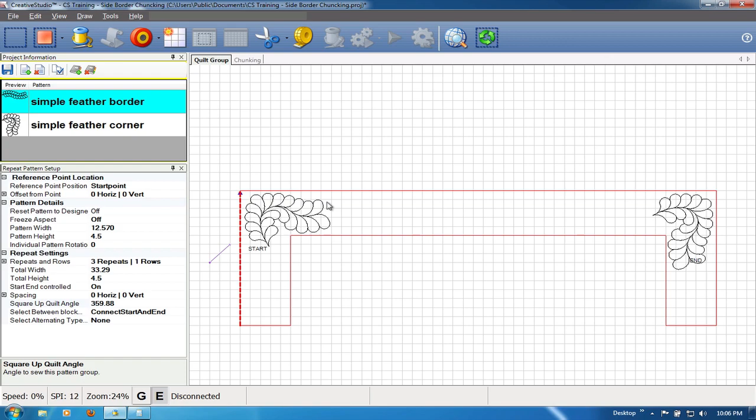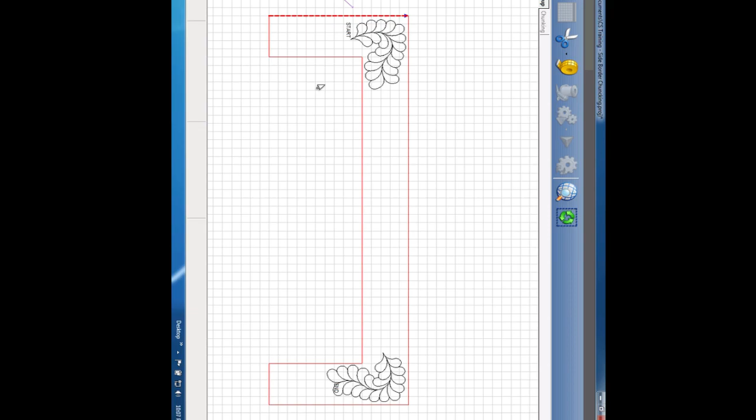Also, on the CAD here, I've got the top border laid out with my corner patterns in place. If you imagine this turned on its side, this space right here is what you are going to be left with to fill on your side borders as you chunk down them. This measurement is pretty critical to figure out how many repeats you need and what size they need to be. To get that measurement, I measure from the top edge of my quilt to the end of this pattern—that's your critical dimension, where that pattern actually stops quilting.

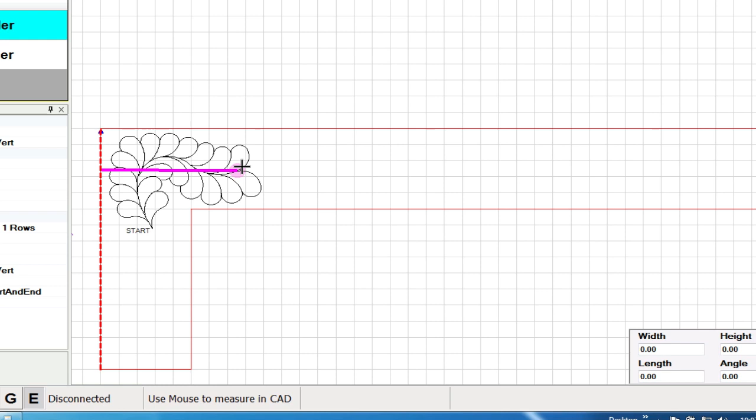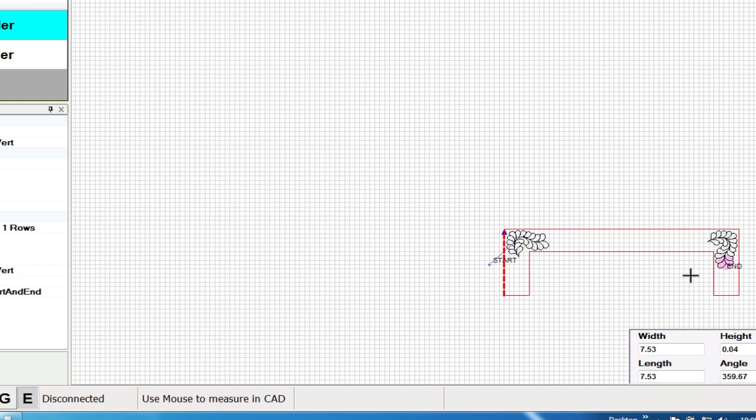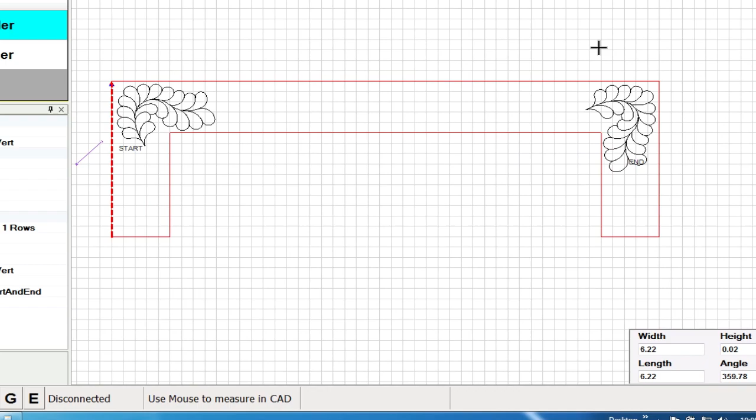In this case, I'm going to use Alt-M to do my measurement. Oftentimes in the real quilting world, I'll just use a tape measure. So I'm going to measure from right here, put my end snap on, and measure to the actual end of that pattern. Down here I can see it is 7.53 inches. I'm going to write that down now so I remember it. Then, over here, I'm going to take another measurement—from this end, turn my end snap back off, over to the edge of the quilt again. That measurement is 6.22 inches. So that's the space between the start and end of the patterns.

My quilt length is 56 inches overall. Bringing up my calculator: my quilt length is 56 inches, then I subtract the distance over here, which was 7.53, and I also subtract the distance over here, which was 6.22. That gives me a total space to fill of 42.25 inches on my side borders. I want to remember that number because I'll need it to set up my side borders for chunking.

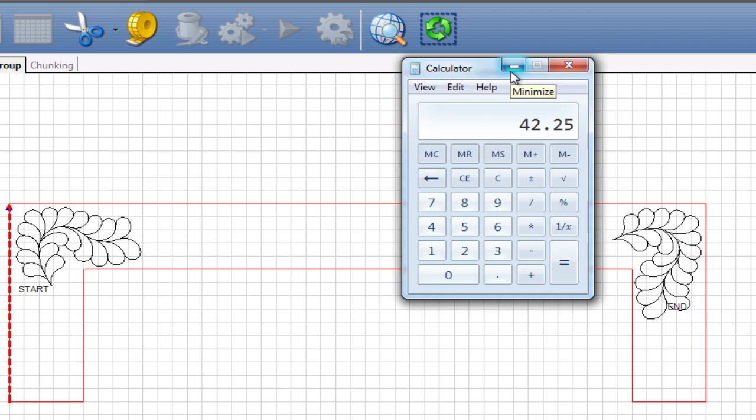Also, I like to remember that quilts shrink as you go down them usually. So generally, if that measurement was 42.25, I usually subtract about an inch, sometimes 2 inches if it's a very long quilt. In this case, I'm just going to subtract an inch and make it 41.25 inches.

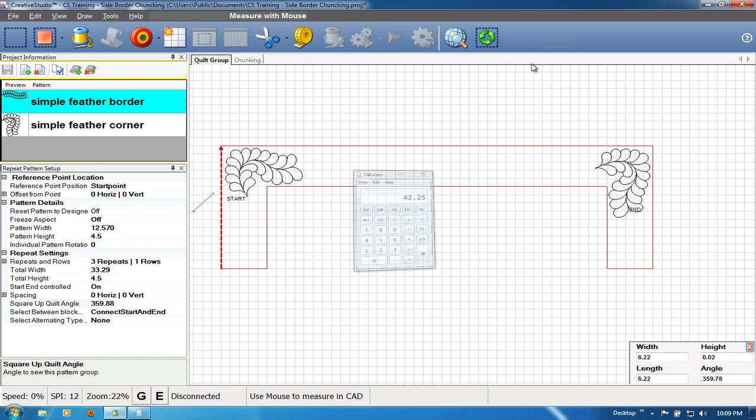It's not a very hard thing to do from this point forward. You'll notice I have a new quilt group here, which I called chunking—sometimes I call it side borders. You can call it whatever you want, just so long as you can refer back to it as you scroll or roll down the side of your quilt. I'm in standalone mode here for this demonstration, so my two side borders are awfully close together, but it will serve the purpose. I have a border on the left side and a border on the right side. We already did our measurements, and we know that between the two corner patterns there will be 42 or 42¼ inches to fill. We're subtracting 1 inch to allow for shrinkage, giving us a total of 41¼ inches to fill down the sides.

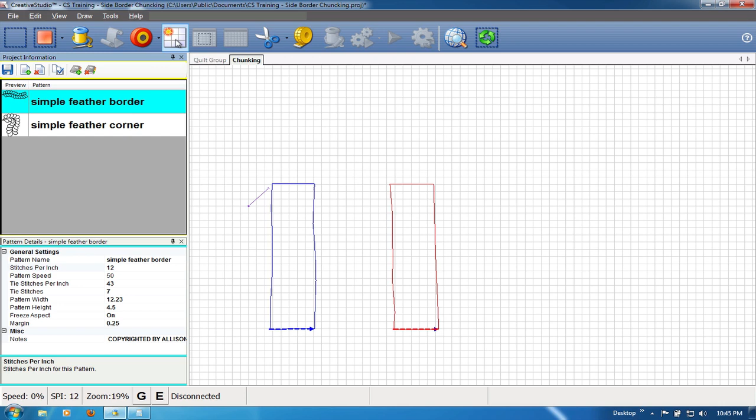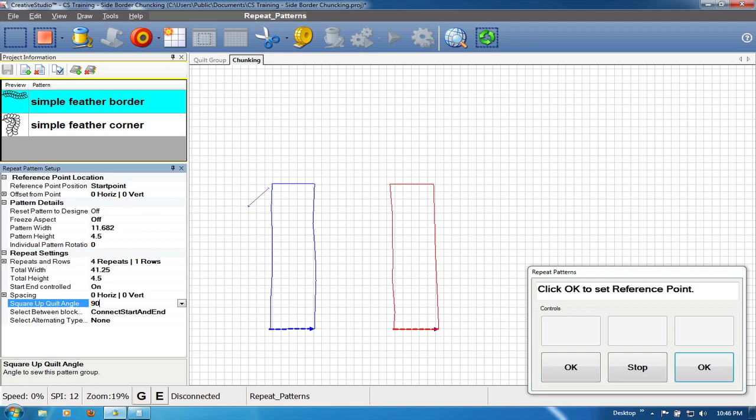To do that, I go into repeat pattern mode, and go to my total width. The actual height of my border, the simple feather border pattern, was already set to match the quilt size. In this case I want the total width, because we're going to set this part of the pattern that goes this way, but use the square up angle to determine which way the pattern runs. So at total width, I'm going to put that dimension, 41.25. You want to make sure the start-end control is on, and then on the square up angle, I'm going to put in one simple figure: 90 degrees. 90 degrees takes care of the left side of the quilt. When I hit OK, there it goes.

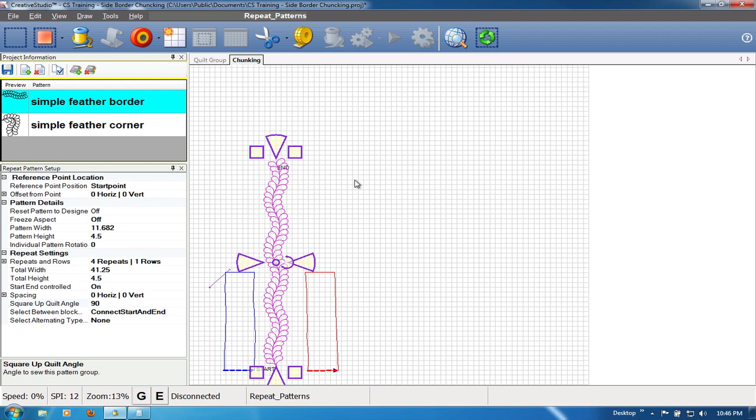This particular pattern runs in a clockwise direction. I'm going to move it over here just to get it out of the way for when I place the other one. Anyhow, those would be the repeats we need to run between the border corners. Of course, you can see how much room I have to quilt with—we won't be able to fit the whole thing in one pass. But then I want to set up for the other border as well.

Again, my total width is 42.62. Start end control is on. Whoops, I don't want a bobbin pull up there. We want to connect the start and ends.

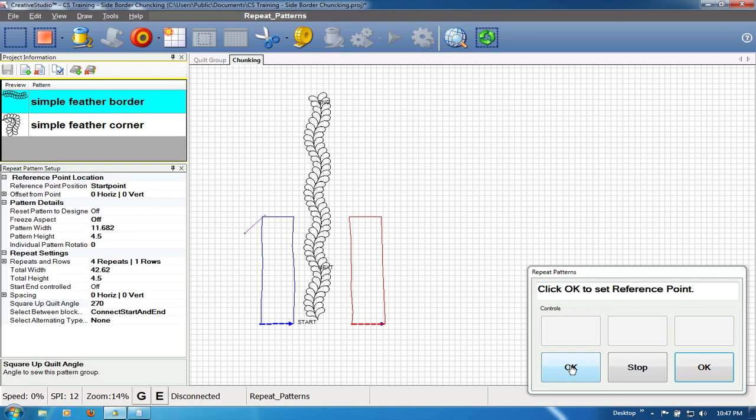The square up angle for the right side of the quilt, when a border pattern is running in a clockwise direction, is 270. Put that in, I hit OK, and there's the borders running this way. So it is 90 degrees for the left side of the quilt, 270 degrees for the right side of the quilt. I keep that on a little piece of paper taped to my monitor so I can plug those figures in very quickly and easily.

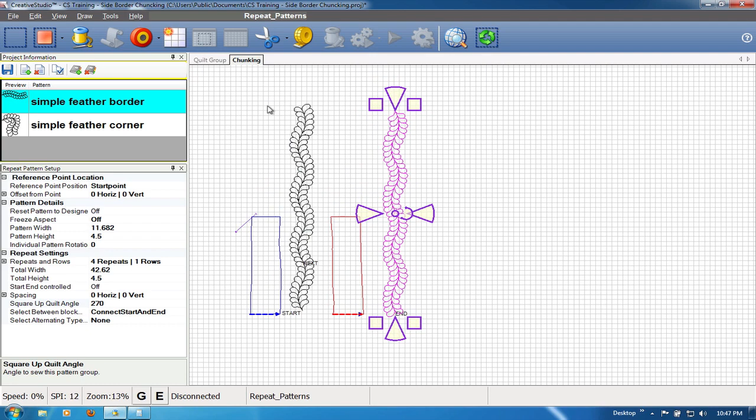Anyhow, these patterns are all right here and they are ready to be used, but I am going to toggle them sewn so that certain ones don't get stitched out that shouldn't. That will cause a problem.

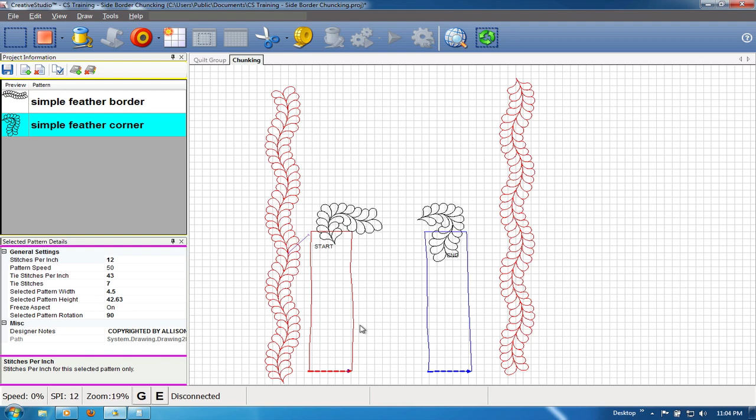Okay, now if you've noticed, I placed a couple of corner patterns on my CAD here. They are imaginary patterns for me on the screen, and for you. In actuality, the corners are on your quilt. You can't see them on the screen.

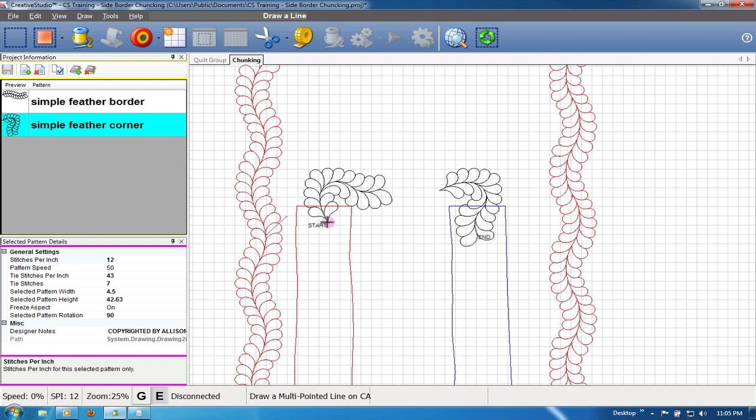So what I like to do to be sure I know exactly where I need to line my border up with the corner pattern is use a point-to-point line. On the screen, because I am in standalone, I'm going to say Alt-L, and use an end snap. Now you will be on your Statler, so you are going to use point-to-point line. You're going to take the head of your machine and find exactly where that corner pattern started last time. Look for the tie-off.

Go out to the side here, make a little check mark. I like to do the check mark again because it gives you something that you can really grab hold of. Then I'm going to go over here and do the same thing. I'm going to find exactly where that pattern stops stitching. I'm going to go out and make a little check mark.

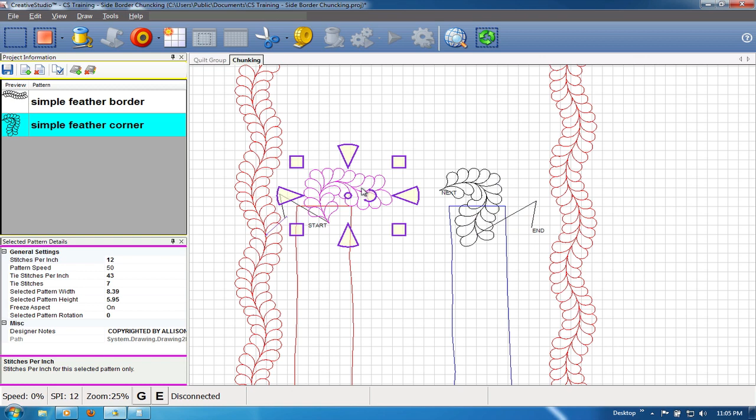I can delete these two patterns because we really don't need them there anymore. Because actually that's all you're going to see on your screen. Those corners were on the quilt, not on the screen.

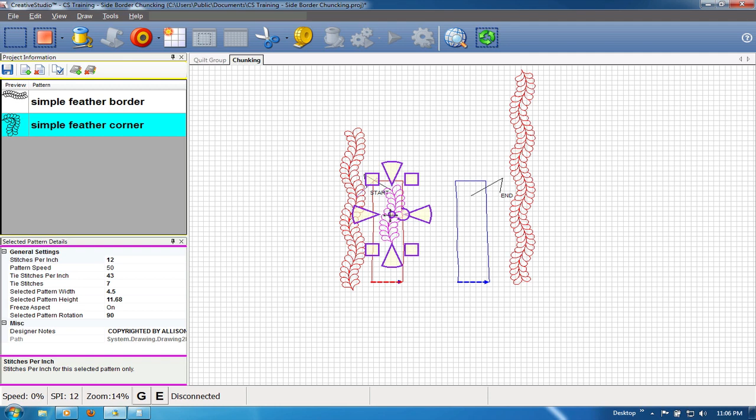Now I'm going to drag this pattern because I'm only going to be able to fit one repeat. I can't fit two. I'm going to drag this pattern and this pattern right down here to fit. It needs to go somewhere right around in here.

I'm going to change to my F11, my end snaps here. Put end snap on and snap it to that point right there. And then I'm going to use this side. I'm turning end snap off.

I'm going to tip it so it fits right. These borders are really out of whack.

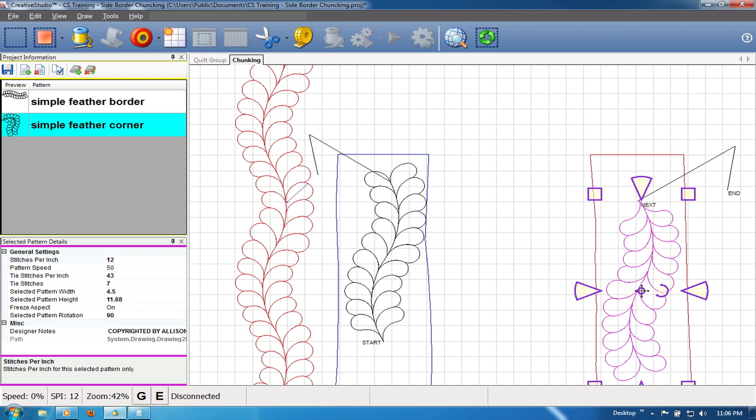I'm going to use, whoops, I hit F8. I'm going to use F9 to get myself close to the starting point of that pattern. Switch to F11, my end snap handles.

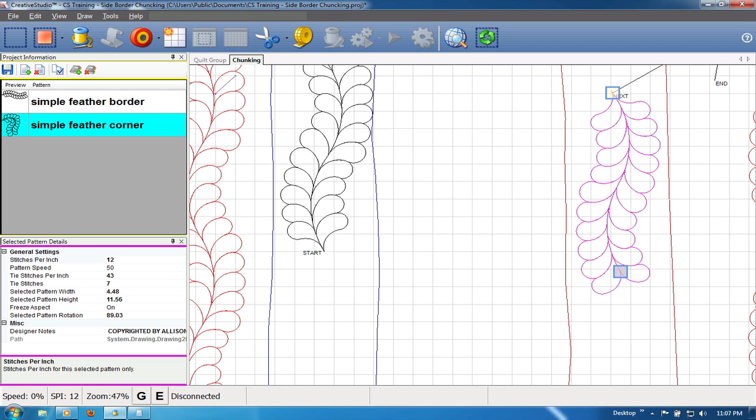And I'm going to snap this end right there to the pattern. Then I'm going to go over here and take end snap off, and rotate this so it fits real nice in that border. Be very careful that you don't stretch it out, because if you stretch it out, you're going to change your measurements as far as the overall pattern goes.

Alright, let's toggle this sewn and toggle this sewn. And then these patterns are ready to stitch out.

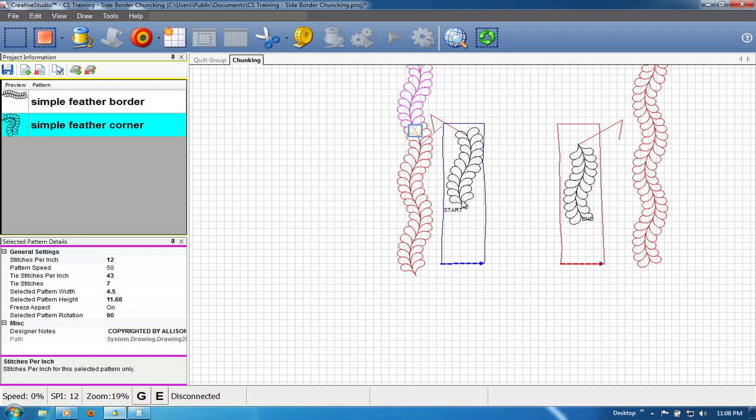The next time you roll your quilts, you'll do the same thing with the check mark again. You'll make a check mark where this one stopped and started, a check mark where this one stopped and started, and then you can just take your next repeat. I like to use a fresh repeat every time, because if you did alter anything on this pattern, at least you know you've got your original dimensions back again.

Something else I like to consider too, if you notice, this had originally made 4 repeats. It was 1 here, 2, 3, and 4 repeats. After I get done with about half the quilt, sometimes three-quarters of the quilt, depending on how long it is. In this case, I would definitely do half the quilt.

I like to go with a tape measure then, and measure from the last end point of the border I did, and measure down. I unroll some of my quilt and measure down to where that corner is, just to see if my measurements are still coming up pretty close.

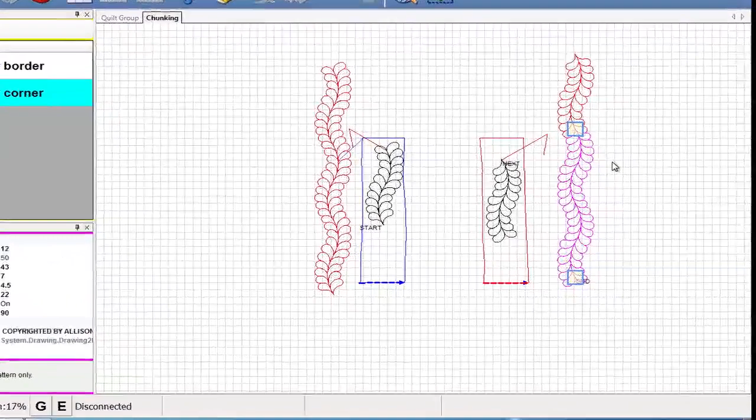You should be able to use Alt-M and measure from this end snap to that end snap and see if your dimension is actually pretty close to what you have left on the quilt. If it's not, I would highly recommend...

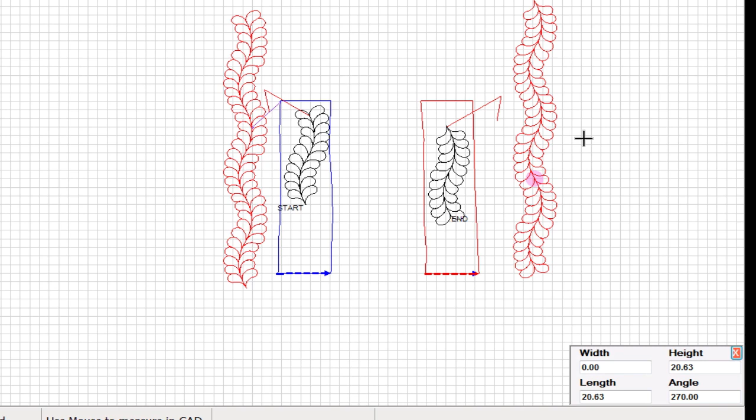Selecting those 2 patterns, switch over to F9 and make it shorter or longer. Make your adjustment now. Don't wait for that last repeat. It will be a pill.

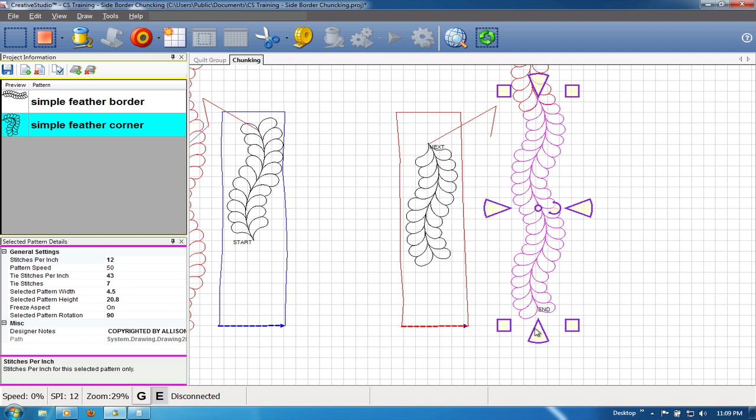Sometimes I've had some pretty wild surprises left at the very end, and it's too late to correct it with 1 repeat. If you have 2, you can kind of get something done, but if you have only 1 repeat left, there's not a lot you can do, because you're either going to have to drastically stretch or drastically shrink, and you'll see it and your customers will see it too.